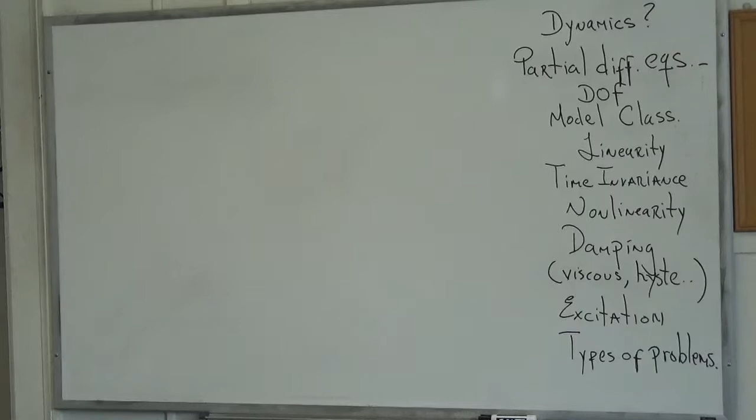Now, I have placed here on the right side of the board, I did my best so that this would be readable to you. I put a list of words, which are simply intended to give me guidance so I remember what I am supposed to be talking about. This first lecture is primarily introductory, so let's begin.

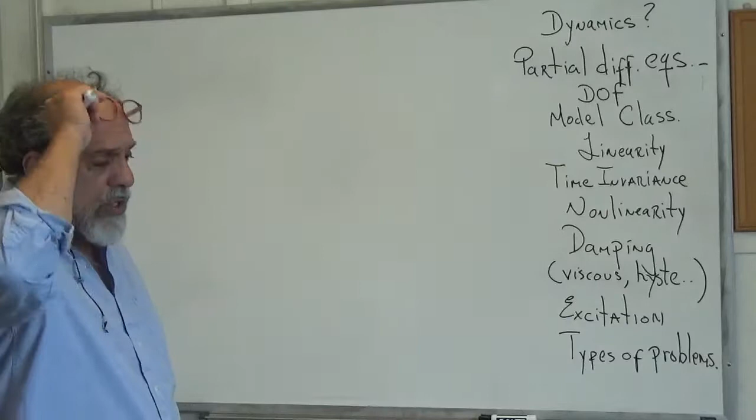My first word here is dynamics. So the course is called Structural Dynamics. Now, of course, we kind of know what structures are. But what is it that we mean by saying that a problem is a dynamical problem, or a problem that belongs to the realm of structural dynamics?

At this point in your career, we're all familiar with structural analysis, and what we mean by dynamics essentially is that when we have the structure under some excitation, we cannot neglect the effect of inertia. There's a slight twist you could add, because in other cases you could also say you cannot neglect the effect of damping forces, but that's maybe an unnecessary subtlety.

The point here is that as loads are applied to a structure, the structure deforms. If at any time we can analyze the stress field that the loads are producing, and we don't have to worry about the inertia, then we just have a static problem.

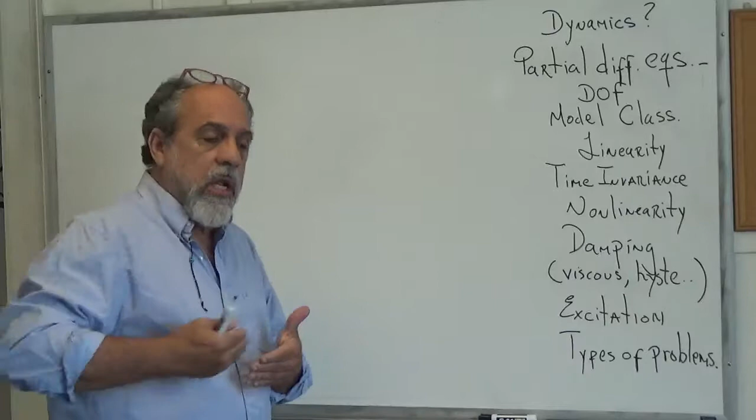Now, if you want to be really literal, you could say that all problems are dynamic, in the sense that there is no such thing as a static load, because if the load was at some point zero and then it became a value, the load had to grow over time, so it was time dependent.

Now look at this case, just to make this point, I won't dwell on it anymore because it's rather obvious. Let's say that we have this spring, with a constant K. If I apply a load and call the elongation of the spring y, and we apply a load at the end of the spring, P, which is a function of time...

Now, is this a dynamic problem? No, it's not a dynamic problem, because the equation of equilibrium simply says that the deformation y of this spring is the value of the load divided by the spring constant. So there is no differential equation here, there is no dynamics. The response as a function of time is just the load as a function of time. Even though this could be whatever, we still have the same as a static problem. If this load was static, we would simply say that y equals p over k.

So what makes the problem dynamic is not necessarily that the load is a function of time, but that the response of the structure to the load as a function of time is going to involve significant inertia response. So this is just a static problem.

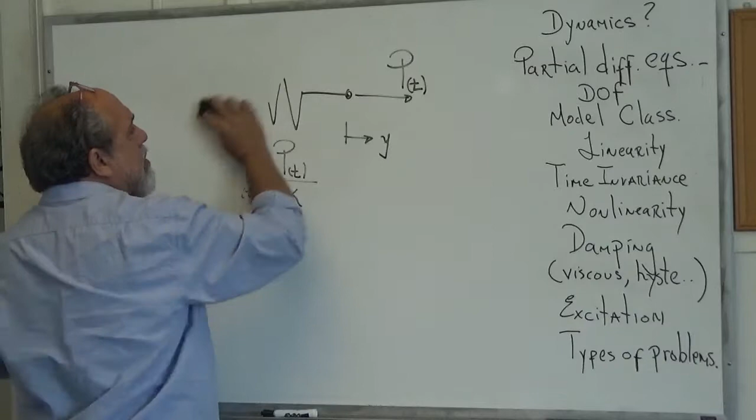Now, let's see, I'm going to try to keep the board as clean and visible as possible. So if we take that out and say, well, what if we look at the same thing? Of course, the previous spring is what we call an idealized spring, because even without thinking about it, I already assume this is a spring with no mass, which of course doesn't exist. How can you build a spring and have no mass? But in our idealized mathematical sense, we say the mass is small enough for our purposes. So anyway, it's just K.

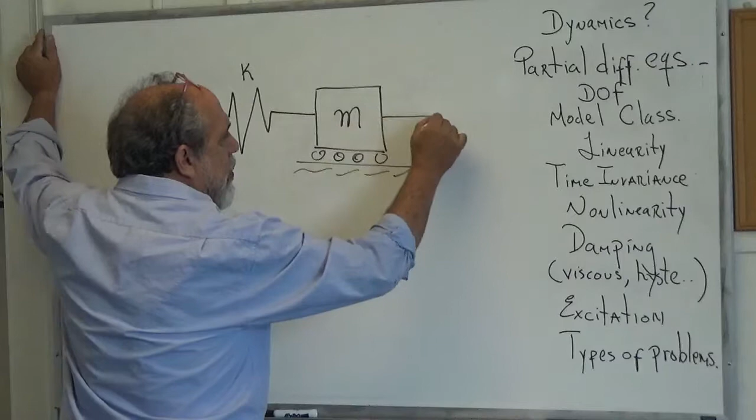Now let's say that we attach at the end of the spring a mass having the value M. And in order to make it look reasonable, so it doesn't look like the mass is falling down, I'm just going to put a little roller there, and do the same thing: apply a load P as a function of time and call the movement of this mass y, which is also going to be a function of time. Now, if we look at this and isolate the free body diagram of this mass...

Then we have the load P as a function of time. We also see that the spring is going to be pulling back as K times Y as a function of time, right? But we're only looking at equilibrium in the horizontal. In the vertical, it's obviously just the weight being carried. But if we look at that, that's not complete, right?

Because this mass in general is accelerating, and according to Newton's law, we know that force equals mass times acceleration. Now, in mechanical engineering, it's typical to write things like that. Let's say force equals mass times acceleration.

That means, I'm sorry, what did I do here? Where's the eraser? Not force times acceleration. The summation of the forces is equal to the mass times acceleration. That's what I meant to write. So this is Newton's law, right? The summation of the forces is equal to the mass times acceleration.

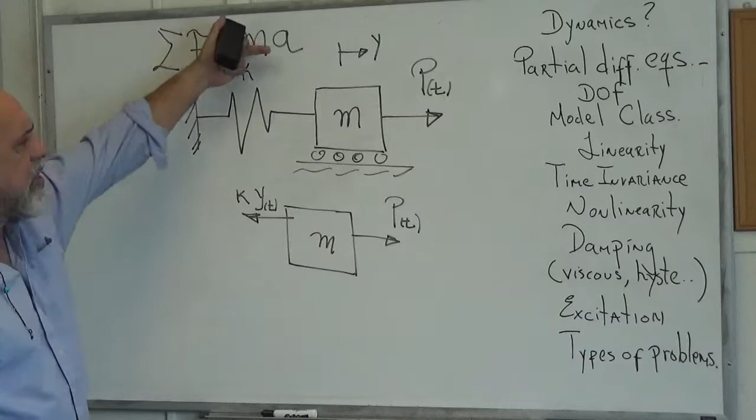In civil engineering, because we come from a tradition of statical structures and statical things, and we don't want things to move and so on, we've traditionally written this equation not as summation of the forces equals mass times acceleration, but we tend to write it like this: summation of the forces minus the mass times acceleration equal to 0, which is obviously the same thing, right?

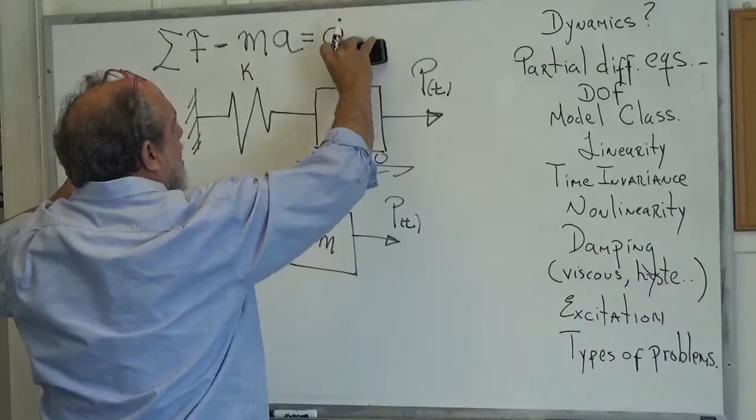Putting back my y here. So again, sum of the forces equals mass times acceleration, or sum of the forces minus the mass times acceleration equal to 0. In this sense, we look at the equation of dynamics as if it was an equivalent equation in statics. So what happens then is that we draw the inertial force, right?

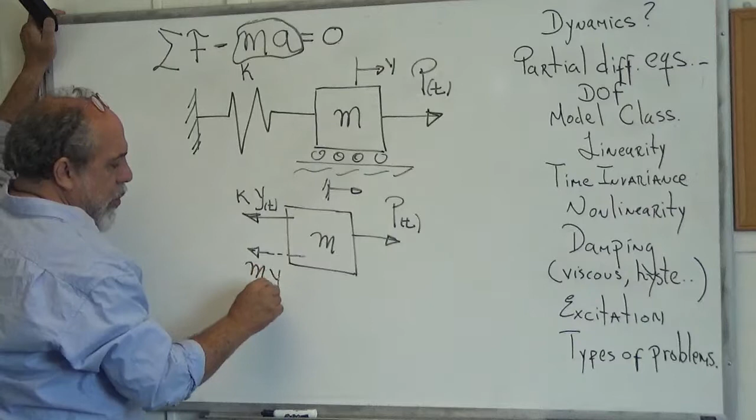This is the inertial force, in a direction that is opposite to the positive acceleration. And so in this case, since y is positive to the right, we would say the acceleration is positive to the right, and so we would put an acceleration to the left and say there is an inertial load, which is mass times the second derivative of y with respect to time, right? And then we can treat this free body diagram as being a statical problem or an equilibrium problem.

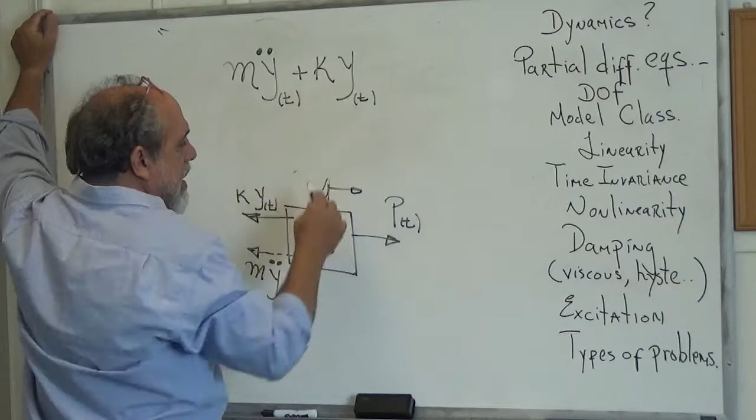So from that sketch, let me erase the top here to give me a little room. So from that sketch, we can see then that summing forces in this direction, we would say that mass times acceleration, the double dots mean derivatives with respect to time, plus the stiffness coefficient of the spring times the displacement, minus P(t), or putting the P(t) on the other side, is this, right?

So in this case, we can no longer say that y is just P over K, because we have the inertial term. So what is the static problem? It's the problem in which this inertial term is so small compared to the other term that we just simply discard it, right?

Now, in this particular case, I placed no energy dissipation. This would be a conservative system. In any case, this problem, like this, is simply what? A second order differential equation.

So given P as a function of time, this doesn't require any real engineering per se. You can give this to somebody that just knows a little bit of mathematics of differential equations, and if P is sufficiently simple, we can just solve for y as a function of time, right? And so on.

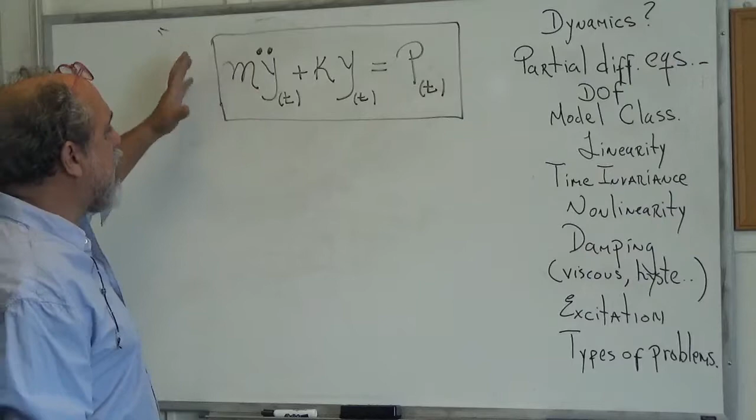We will come back to this, of course, later on. But at this point, what I want to say is it's not to focus on the solution of this equation, but to focus on the next line here on the discussion, which says partial differential equations. So I'm going to erase the first term and assume that we already made sufficient observations. I'll wrap it up by saying this.

There are problems in which the load may be varying with time, but there is no need to do dynamics, because what we've got is just a sequence of statics problems, because the mass or the inertial forces associated with the solution to the problem are not relevant compared to the stiffness resistance to the applied load. That simply means that the load is applied too slowly in relation to the ability of the structure to react.

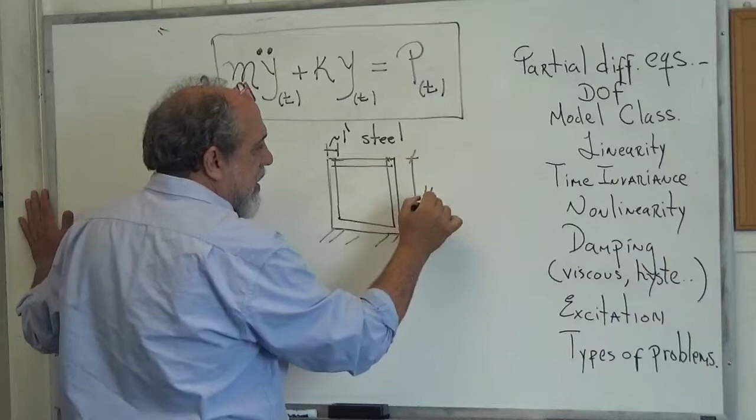If the structure can react very fast, for example, just as a last thing, imagine that you have a container like this sitting on the ground, let's say a box, and this box is 1 foot thick, made of steel or something, and it's 10 feet high or something, and then what you have is a load here, P, which is applied, which is a function of time, but it's varying like this, where let's say this is 2 minutes.

So more or less on that scale, you can see that this load is varying so slowly that, well, perhaps here you could see a little bit of dynamics if it's going up fast enough. But my point is that this structure, if you actually plotted how much this point will move due to this load, it would look just like this plot also. There's no inertia, just the load. Even though it's a function of time, there's no dynamics here. Okay, let's leave that aside and move on.

Our next point is that when we draw a mass, like in the previous example, and say this is a point mass, this is an idealization. There are no point masses. Mass is always distributed. The problem is always one in which there is stiffness everywhere and mass everywhere.

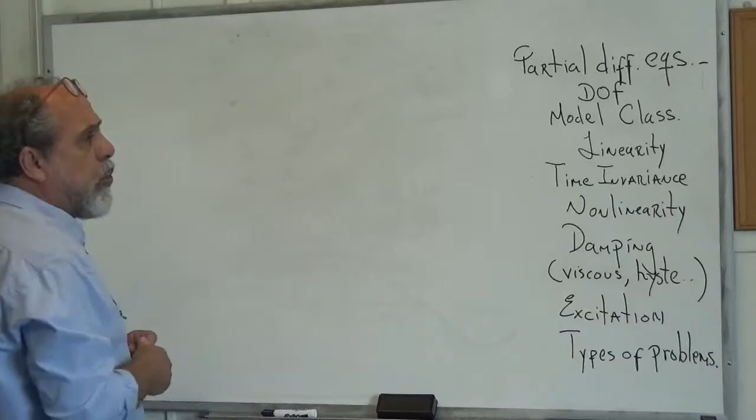So what happens is that we get not ordinary differential equations, but partial differential equations in dynamics. The true solution of any problem in structural dynamics, if we really want to be precise, would have to be partial differential equations. Although in practice we seldom deal with partial differential equations, because it's significantly simpler to make approximations that allow us to use ordinary differential equations.

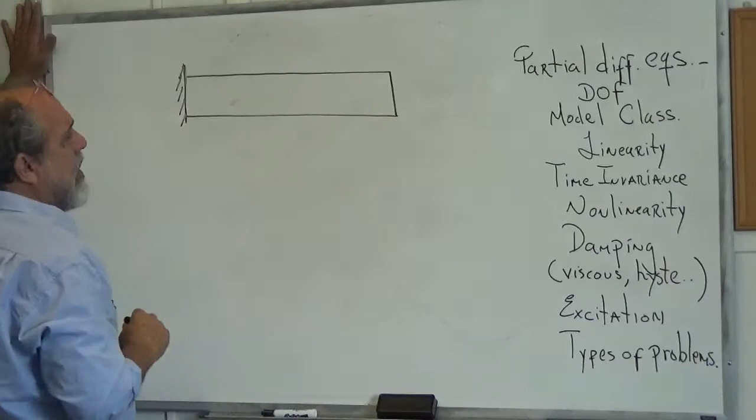But leaving that for next, let's consider for the next section of the discussion the case of a rod. Let's say that this rod is of length L, that it has an area equal to A, and a modulus of elasticity equal to E, and that length is L. And let's say that at the end of this rod we have an applied load P of T. Let's postulate that the X-axis is running with the rod.

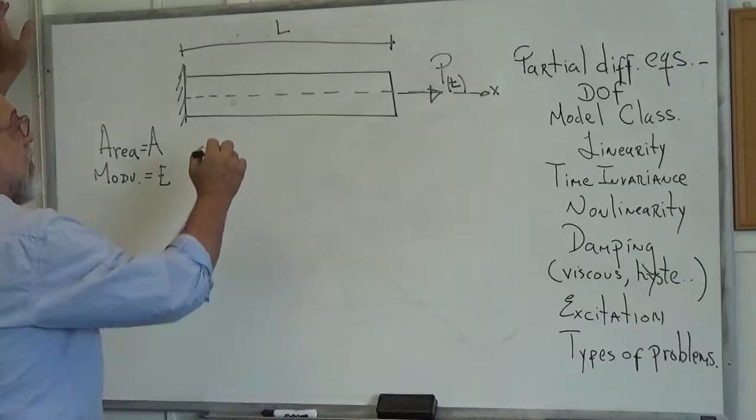Excuse me for a second, let me check here just to make sure I keep my notation the same as in a set of notes I'm going to give you. So, to be consistent with what the notes are going to show, I'm going to call the movement of points in the rod in the X direction u, due to the load P of T. And that's basically it. So we want to examine this situation.

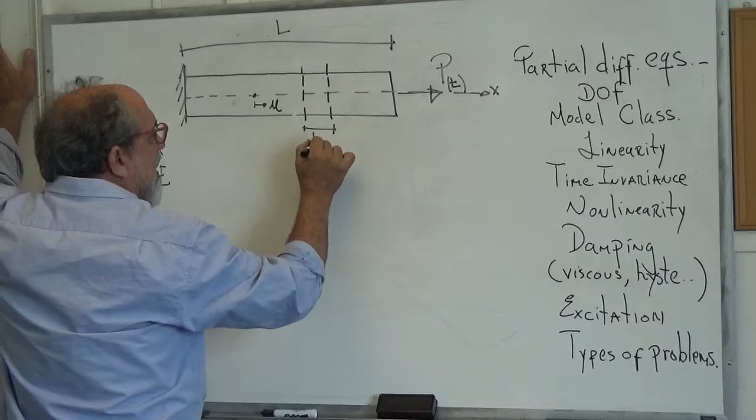For this purpose, let's say that we take a piece of rod which is of length dx, and we look at the free body diagram of it. So this is a dx section of the rod, and we would have the following situation.

I'm assuming that the load is centrally applied and that the material is responding such that we have a uniform stress field here, just pure axial stresses. This stress, sigma, that we have on the back side of the cut would be a function of x and a function of time, right? Now on the front side of this free body diagram, we can say that we have the stress sigma that we had in the back plus how fast the stresses are changing in x.

So we would say the partial derivative of the stresses with respect to what? With respect to x, right? Multiplied times dx. So that would be the stress field over here. Now, those are the two stresses.

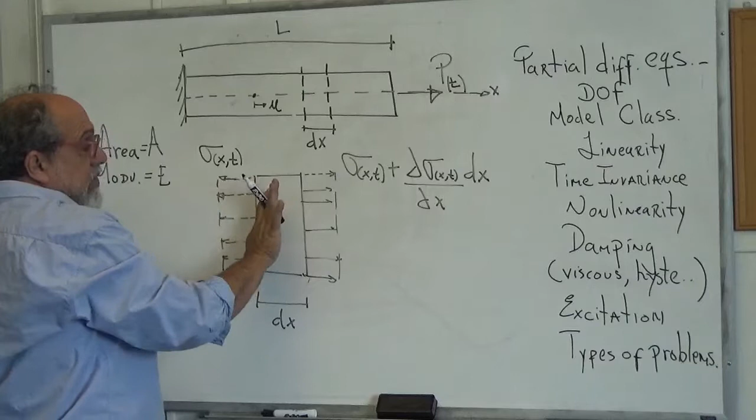What else is there? Well, it looks like there should be an inertial force, right? So this is a very thin slice, only dx. Since I'm taking accelerations to the right as positive, using again our technique of writing the thing as equilibrium, there will be an inertial force here, which would be the mass of that sliver times the acceleration of this point. Now, how much mass?

I should say, let's let the density of the material, the mass density, be rho. That is how much mass per unit volume. So we can say that the mass of this sliver here is going to be the density times the volume of this thing, and the volume of that is the area times dx.

So that's the mass, and then that mass has to be multiplied times the acceleration of that sliver, and the acceleration of that is, by definition, the second derivative of the displacement u, but in this case, with respect to time.

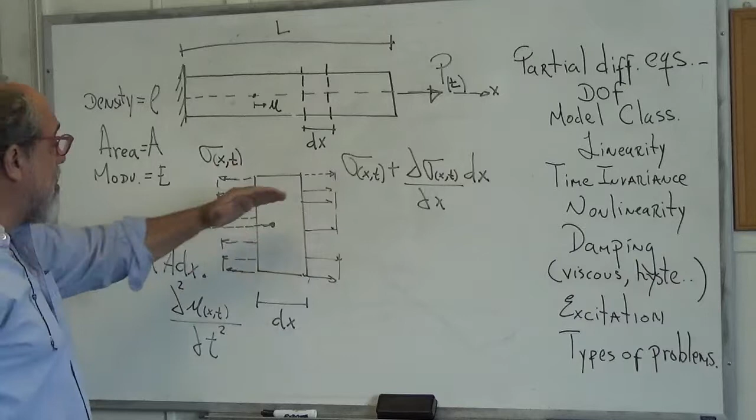So that, I believe, is the complete free body diagram, except I have to convert these stresses to forces before I sum. Basically that's complete because we're not considering any energy dissipation, right?

So I will now erase so that we get some room to work on the top. And so I'll erase this.

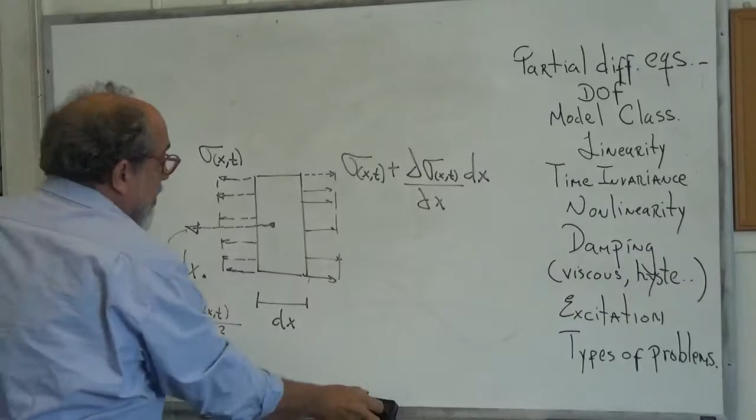From this free body diagram, I will say sum of the forces in the x direction equal to 0. I will have sigma, and I'm going to leave the x and t out to simplify the notation. It's clear that that's what I mean, right? So sigma plus the partial derivative of sigma with respect to x times dx, multiplied times the area.

That's a force going to the right, minus a force coming to the left, which is the same. Force coming to the left is just sigma times the area. There is no partial here, right? And also to the left is the inertia, so we have minus rho times the area times the second partial derivative of the displacement with respect to time, times dx. Times dx. I believe that's everything, right?

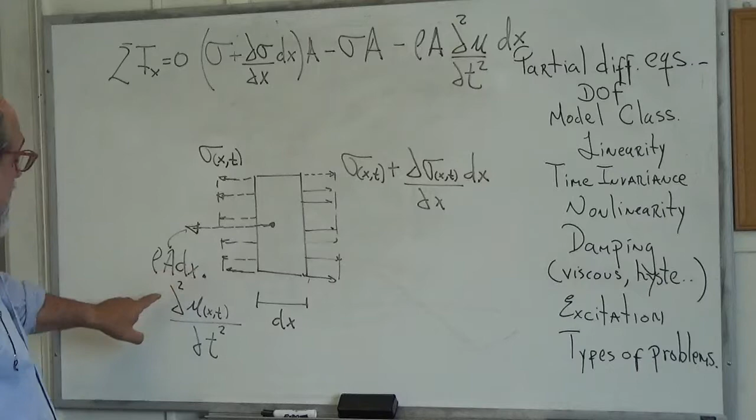Make sure I get this thing correct. No, I didn't. Yes, I did. Rho a dx times the second partial of u with respect to time. And all of that must be 0, right? Okay, now I erase this. Hopefully I didn't leave anything out.

And then we simplify. Now it's clear that this term, sigma a, will cancel with this sigma a, right? And that we're left with partial of sigma with respect to x dx times the area minus rho times the area times dx times the second partial of u with respect to time is equal to 0, right? All right, so we continue to simplify.

We see that the area can be cancelled. Okay, we also see that the dx can be cancelled, and that we are left with the partial of sigma with respect to x minus rho times the second derivative of u with respect to time squared is equal to 0. Okay?

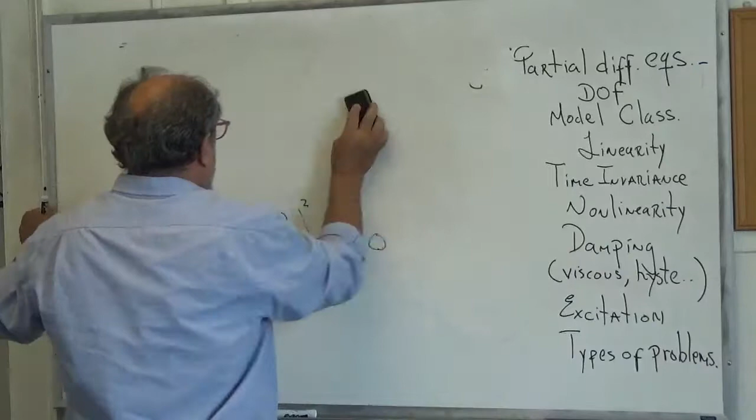Now, let me check here if I'm still doing all right, and I guess we are. I'm still maintaining the notation here. Okay, so now the next thing we're going to do, again, is give ourselves a little room. So we erase here. All right, and we continue by saying, okay, so this is a statement of equilibrium right here.

Let's now assume that the material is linearly elastic, so that we can say that the stress is equal to the simplest expression of Hooke's law, which is the modulus of elasticity times the strain, right? Now, the strain as a function of the displacement is what in this problem? Is the partial derivative of the displacement with respect to the coordinate x, right? So we know that sigma is E times the partial of u with respect to x.

And it thus follows from here that the partial of the stress with respect to x is just simply the derivative of this, which is equal to E times the second partial of u with respect to x squared, right? And so we have that.

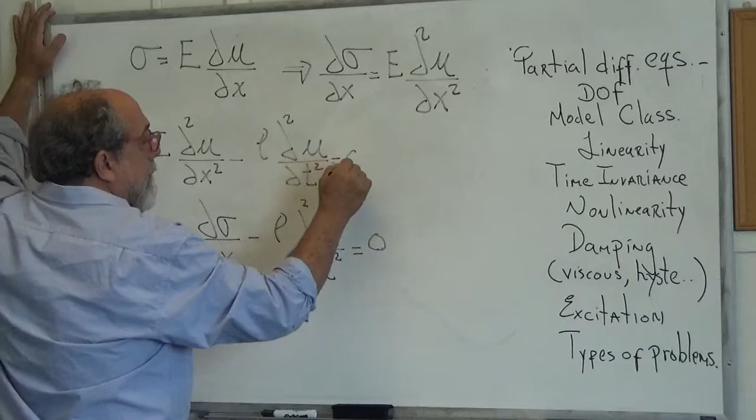Therefore, substituting this here, we would get E multiplied times the second partial of u with respect to x squared minus rho times the second partial of u with respect to time is equal to 0. And I think at this point, I can take this out. I can take this out. And this is where we are, right?

Now, dividing by E, we can write that the second partial of u with respect to x, two derivatives, minus rho over E, times the second partial of u with respect to t squared is equal to 0.

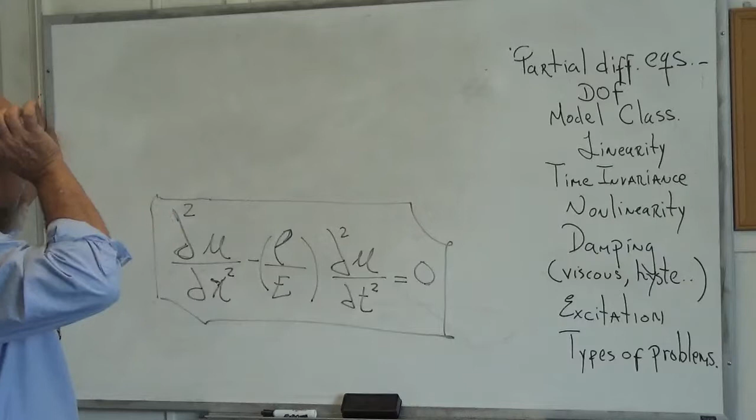So you see that we've arrived not at an ordinary differential equation, but at a partial differential equation, because we have derivatives with respect to x and derivatives with respect to time in the displacement field, right? We also see that the problem is governed not by the density or by the modulus independently, but that the response depends on the ratio of the density by the modulus of elasticity.

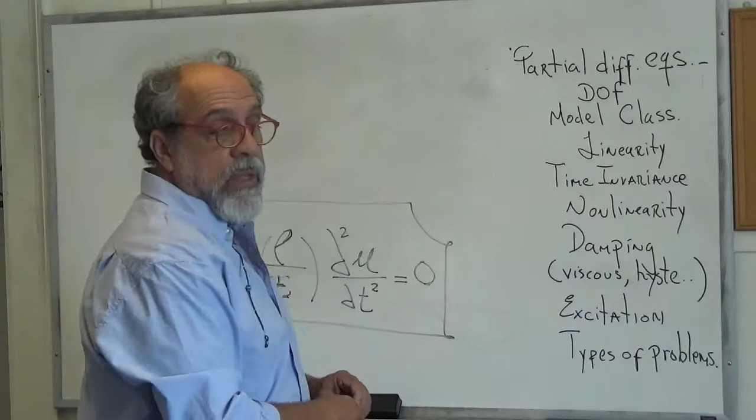Now, let me see how far I want to take this by looking at the notes here. Well, so let's say, for example, that we wish to solve this thing. Of course, this doesn't even have anything to do with the loads at this point. So you could, let's say, for a little bit of an exercise, look at the boundary conditions, right? And what are the boundary conditions of this problem? Well, I remind us that our rod looked like this, right?

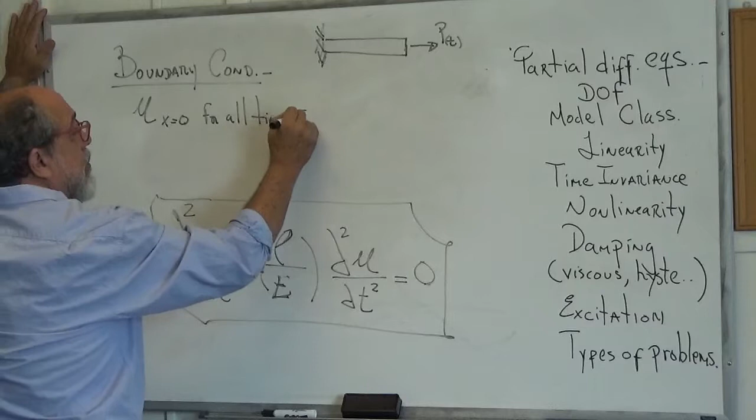Our rod looked like this. So one thing we can say is that u at x equal to 0, for all time, is equal to 0, right? That we know. So that's one of the boundary conditions that we have in this problem.

The other thing that we know is a boundary condition associated with the presence of the load here at the tip, which means that the stress at the tip. So sigma at x equal to L for all time is equal to P(t) divided by A, right? Because over there, that's just the edge, and at the edge, at least under an idealized situation. You might say, in reality, if this is a concentrated load, then of course that's not true because there's an edge effect and so on.

But this is not what we're considering. We're considering the idealized case in which that load P(t) is not really applied like that. To be really precise, I should say that load is the resultant of a stress field which is applied uniformly at the end. So what we are really applying is P(t) over A, and this is the result.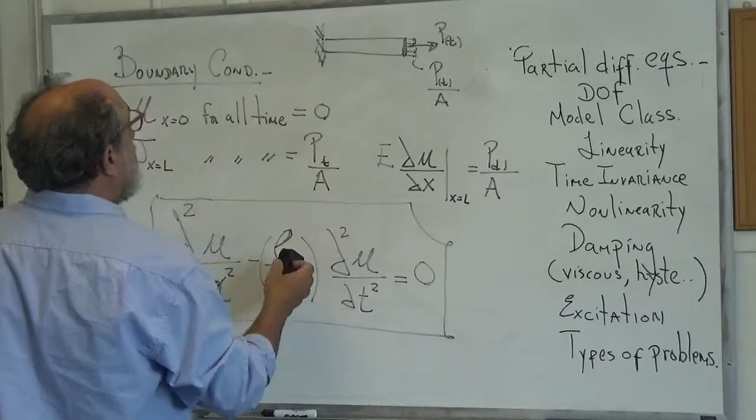Now, sigma that we have is equal to what? Sigma was equal to E multiplied times the first derivative of u with respect to x, right? So what we're saying is that, evaluated at x equal to L for all t, must be equal to P(t) divided by A, and therefore we can also say, running out of room here, but try to put it here on top, we can say that the partial derivative of u with respect to x evaluated at x equal to L for all time must be equal to P(t) divided by A divided by E, right?

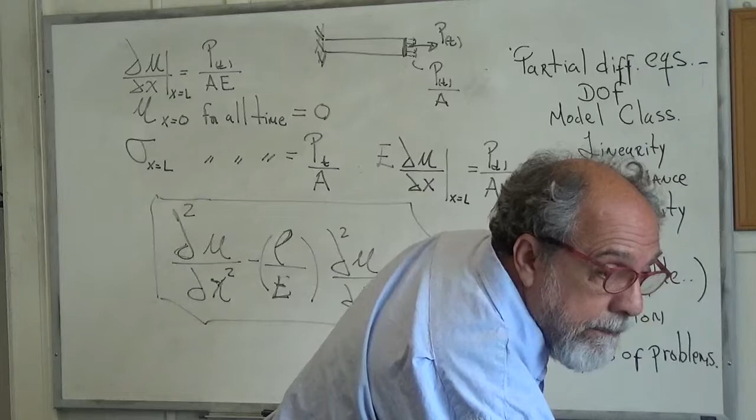And okay, we get to that point. Now, we could try to solve the problem even further, and in fact, I have a handout that I will decide a little bit later whether we want to do it or not, to delve into it, because there's quite a few interesting things that one can do by continuing along these lines.

But I think at this point, for the purposes of this introductory lecture, it's sufficient to simply point out or emphasize that if you consider a problem and you account for the distributed nature of the mass, what you end up with whenever you formulate a dynamic problem is not going to be something like mass times the second derivative of the displacement, but you're going to find a partial differential equation-ish thing, okay?

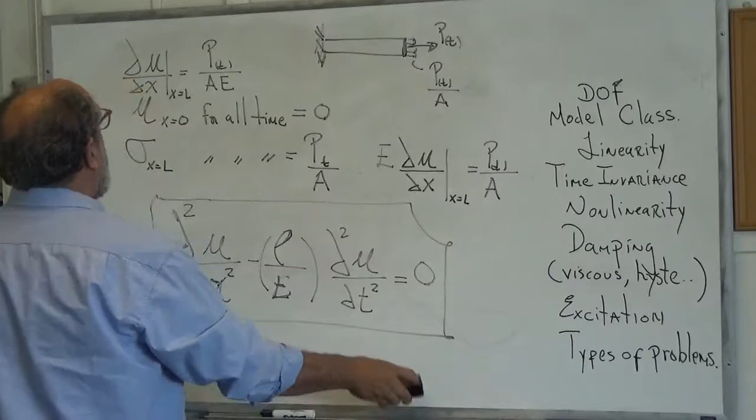And that brings us to the fact that I can erase these partial differential equations, and it takes me to this thing that says DOF. Because by DOF we mean degrees of freedom. So let me discuss then the issue of degrees of freedom, the all-important issue of degrees of freedom, from the point of view of clear understanding.

So if we wanted to do the rod exactly, we would have to solve this equation. Well, let's say that we don't like this equation because this equation is not algebra. I cannot really program it and solve it by taking it, you know, I'd have to solve the equation with its boundary conditions and so on. That may be hard. Now, it's clear that I can convert this problem into a problem that is not a partial differential equation problem, but one of ordinary differential equations by, for example, dividing the rod in pieces.

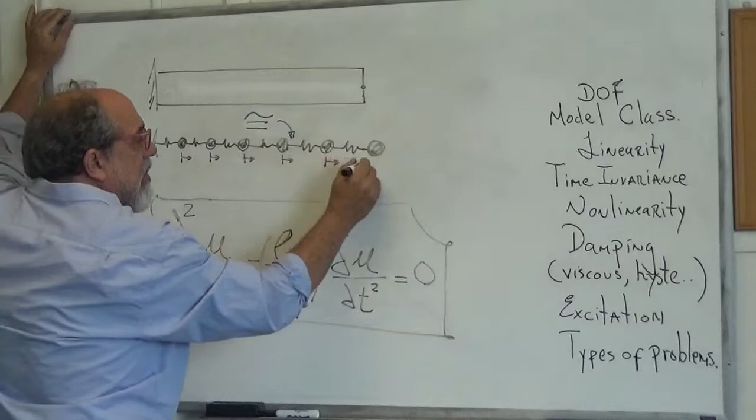Dividing the rod in pieces and assuming that what I have really is a set of springs with little masses connected to each other, right? So let's say that what I've done, maybe I can erase this, is to say that the actual rod is not equal, but it's approximately equal to this. Now, of course, we're talking only in the horizontal direction. In this particular case, it suffices to know how much each one of these masses are moving, because given the movement of these masses, we can calculate the force in the springs and so on.

And we would refer to this problem as having 1, 2, 3, 4, 5, 6 degrees of freedom, or coordinates that we need to describe the problem. Now notice, and this is the point I want to make, that this 6 degrees of freedom is not an innate property of this rod. This is actually a decision that I've made as a user, describing the structure with a finite number of degrees of freedom. The actual rod has infinite degrees of freedom, and I may make a model. So models have degrees of freedom, real structures don't, because real structures have infinite. They have distributed mass and so on, right?

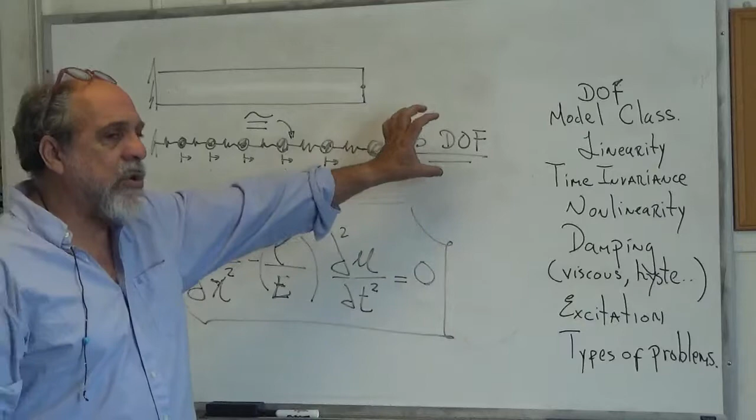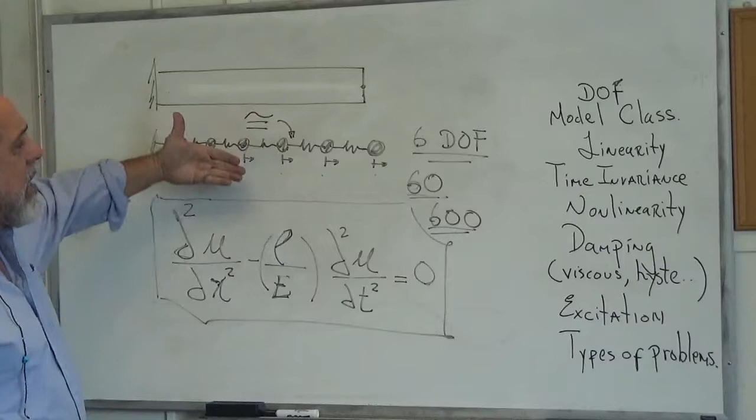Models have degrees of freedom, and we sometimes forget that when we say a frame has this many degrees of freedom, there are implicit assumptions already accepted. In this case, it's obvious: I can make a model of this rod with 6 degrees of freedom, or 60, or 600, and so on. As the number of degrees of freedom or masses increases, the model approaches the real rod further and further.

So the first point is that degrees of freedom is a property of the model, not of the structure we've made. Let's see what else is important to say.

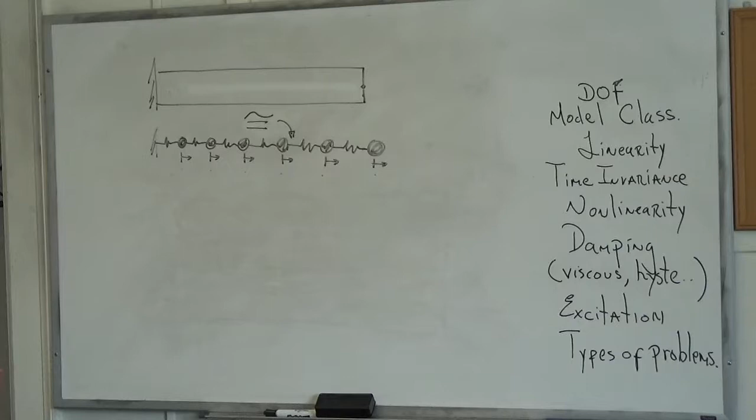Let's take a look at this one, 1, 2, 3, 4, 5, 6. You can map the locations of these masses to the actual physical locations in the rod, something like that. I don't pretend to be precise here as to where exactly you should put each one. That's not important for what I'm talking about.

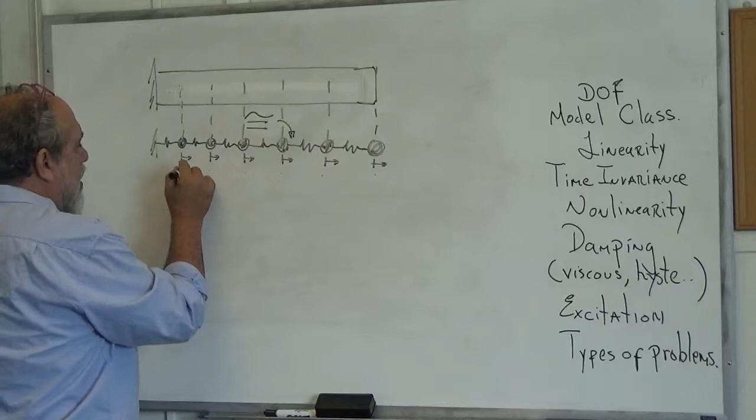Let's call these number 1, number 2, number 3, number 4, number 5, and number 6. At a given time, t equal to t1 or ta, we said that u was equal to A1, A2, up to A6 — six numbers, whatever they were. That's fine.

Now, if I asked you, what is your estimate of the displacement in the rod in the very middle between 4 and 5 at this time — what is u here at t equal to ta? I think most of you would say, well, it's not in the model, but I would take it as the average of 4 and 5 or something like that.

And that's totally reasonable. But the point I want to make is that when we assign to a structure a set of degrees of freedom, implicitly — sometimes explicitly, but often implicitly — we've actually assumed the displacement field in between the coordinates. For example, you might have assumed, even without saying it, that the displacement field between points where you're giving values is linear.

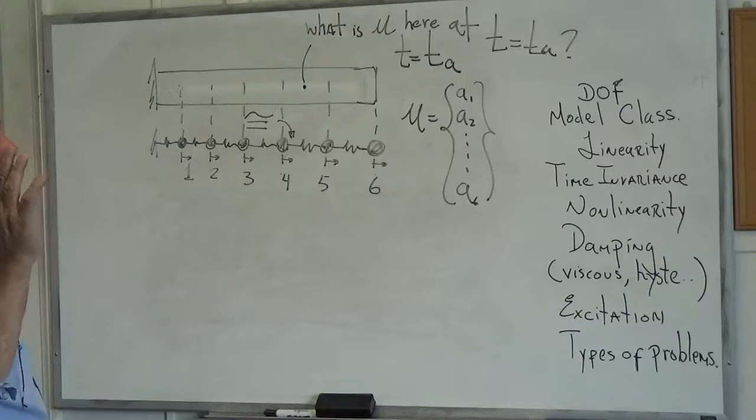Because of course the domain is continuous, the fact that we only have values at a certain number of points doesn't mean that suddenly we know nothing of what happens in the middle. What happens in the middle has been pre-decided, okay?

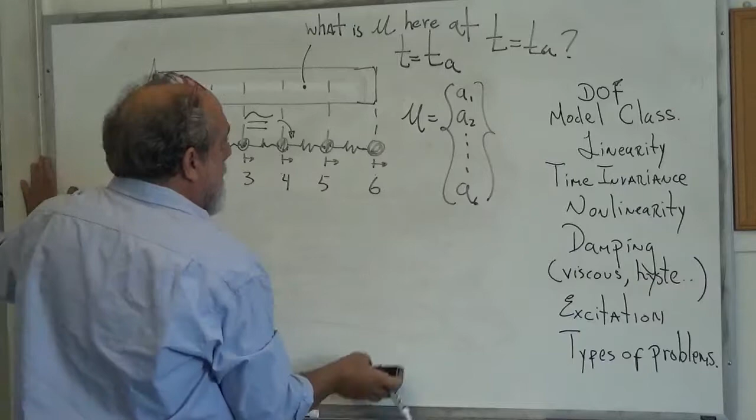So you could say that what the degrees of freedom do is they become the scalars of patterns. Let me explain again — this is important to emphasize, to try to be clear.

So let's say I have this beam, this simple beam — a simply supported beam. And this simply supported beam has a distributed mass m per unit length, and the beam is of length L.

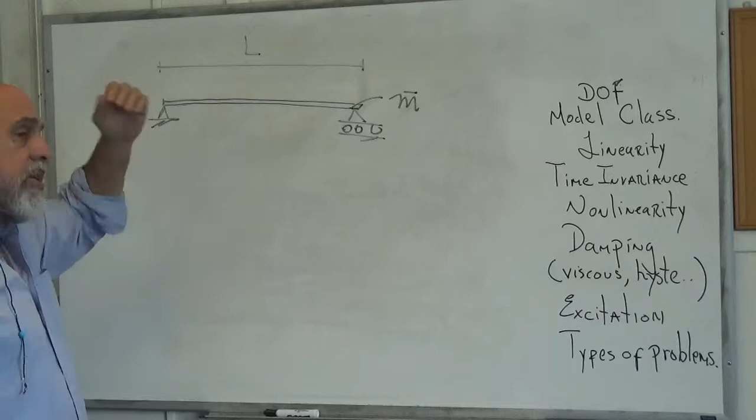Now, how many degrees of freedom does this beam have? Infinite, like every structure. If I want to really be precise, I'm going to get partial differential equations. Now, let's say the boss at the company says you want to make a model with 3 degrees of freedom of this beam for some dynamic analysis about impact of a big weight that's going to fall on the beam, whatever.

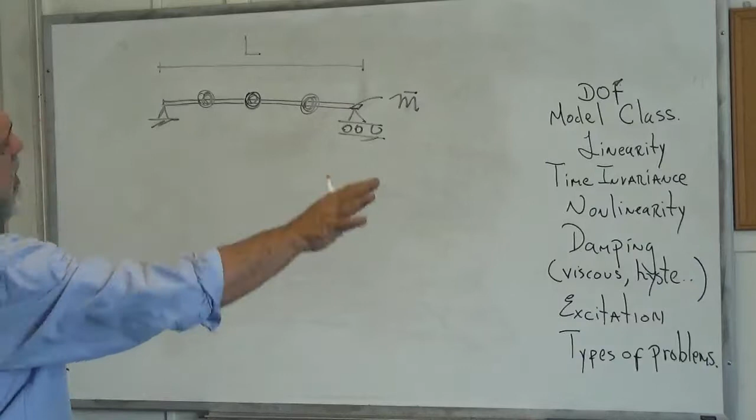So let's say you're told to make a 3 degree of freedom model. I haven't really done very much with this, but my intuition tells me I should get something reasonable if I do something like this: take one mass here, one mass here, one mass here, and assume the beam has no mass.

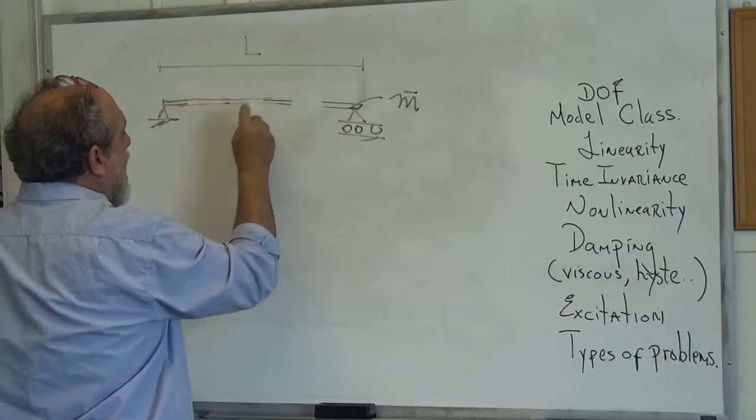So I'm going to replace — actually, let me do this again. Where is the eraser? Excuse me — oh, it's on the floor. Instead of drawing it here, let me just leave the real beam alone, and let me say what I'm going to do — I can't draw this approximately equal sign.

What I'm going to do is replace the real beam by this, where this is massless, and these are, something reasonable, the mass from here to here, etc.

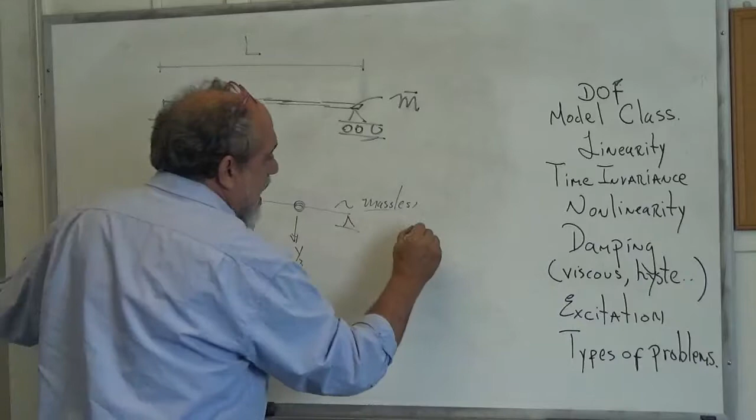My concern is only the movement of this point, this point, and this point. I hope to arrive at the equations of motion and do the dynamics on what will eventually be a 3 degree of freedom problem. We don't need the specifics, the point is this would have 3 degrees of freedom.

Now here comes a question that is less obvious. If I told you that at some time t equal to ta, you had y1 equals 3, and it just so happened that y2 was 0 and y3 was 0, what would you say is happening between y2 and y3, to the displacement field at that time?

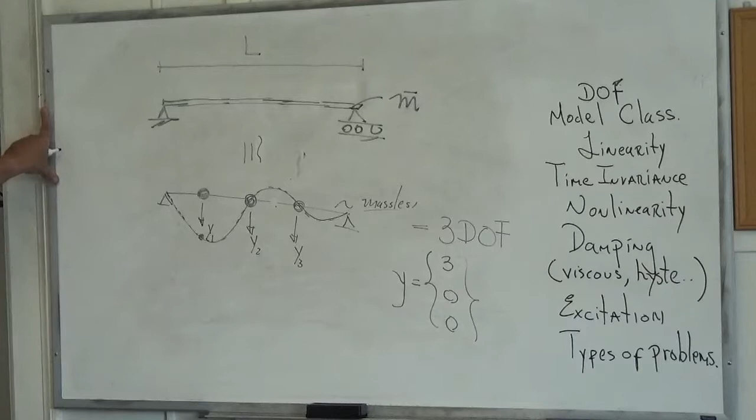Some people might say, I don't know, I'll take it as 0 or something like that. But you might actually assume the following: that if y1 has a value and y2 doesn't and y3 doesn't, my beam would look like that, because I have to have continuity and so on. So this looks like a better guess to me.

And what would that shape be? Well, that might be the shape I'd get if I move this point statically and hold the others in place, and so on.

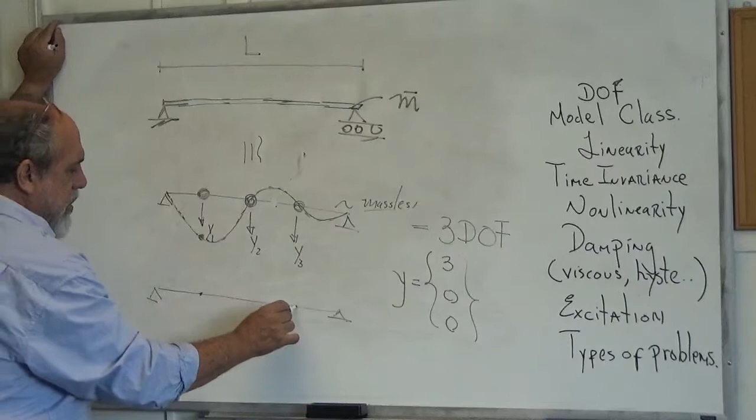Following that line, what happens if instead of y1 having a value, y2 has a value, and none in y1 or y3? It might be along the same lines - not so bad to assume, right? This is y1 not equal to 0, this is y2 not equal to 0. And what about completing it with y3 not equal to 0, which would look just like y1 but on the other side? So now y3 is not equal to 0, but y2 and y1 are 0, and we get something like this.

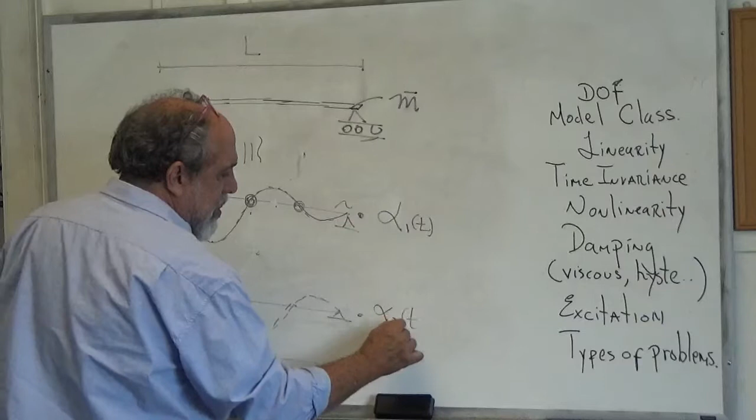So in this particular case, we can see that the degrees of freedom y1, y2, y3, which are movements of the masses, I could also think of as not being the movement of the masses. I could think of the degrees of freedom as the amplitudes of these shapes. So this shape multiplied by alpha 1, a function of time, this shape multiplied by alpha 2, a function of time, and this shape multiplied by alpha 3, a function of time, is the deflection of the beam at any time. So sometimes we think of degrees of freedom as physical, visualizable movements or rotations, and sometimes as shapes multiplied by amplitudes.

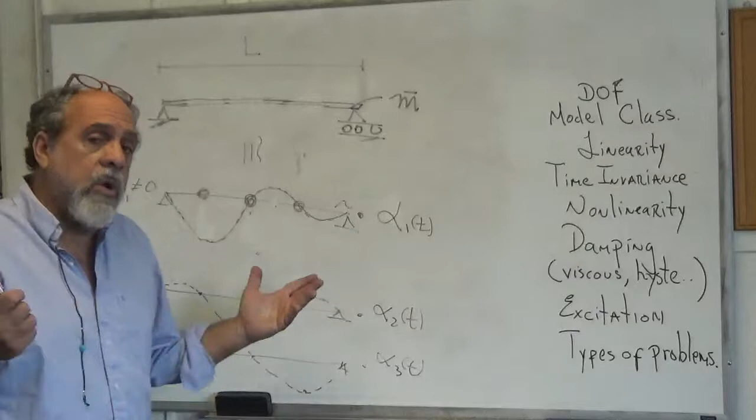In most texts these things are presented as if they were completely different. In my mind they're the same thing - you always have an assumed shape, because the domain has to be interpolatable when the degrees of freedom are known. So you can think of this problem as having y1, y2, y3, or as having alpha 1, alpha 2, alpha 3, and these are the shapes. You get to exactly the same thing.

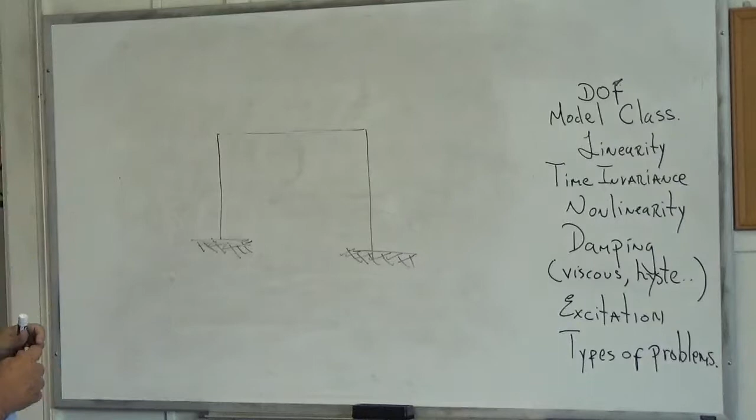Now a last word on degrees of freedom, let me be conventional here. If we look at this problem - and since most of us are in structures, although this doesn't have to be understood only by structures people - let's say you consider a system like that, and give it some width. Let's assume this structure is excited by a dynamic load, P of t, applied there, so it starts moving to the side like this.

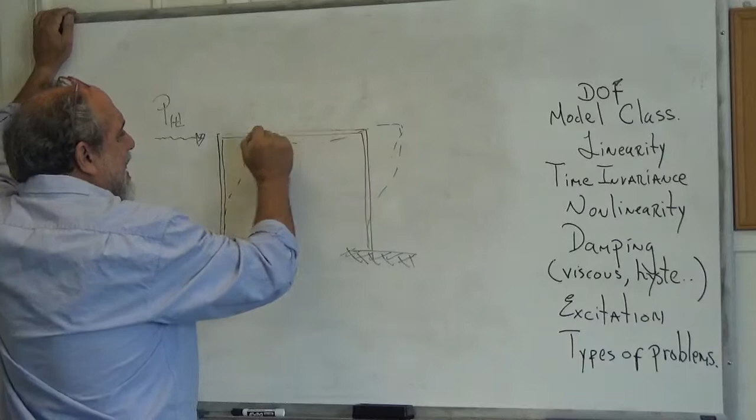Back and forth. It turns out that most of the inertia is associated with the floors, because this level contains - remember this is 3D - so there's going to be another one behind, and so on. So most of the mass of this structure is contained here. For the purpose of dynamics, the only inertia that matters is really the horizontal inertia of this level. So from that point of view, this system could be analyzed using probably only 1 degree of freedom, because there's only one inertia.

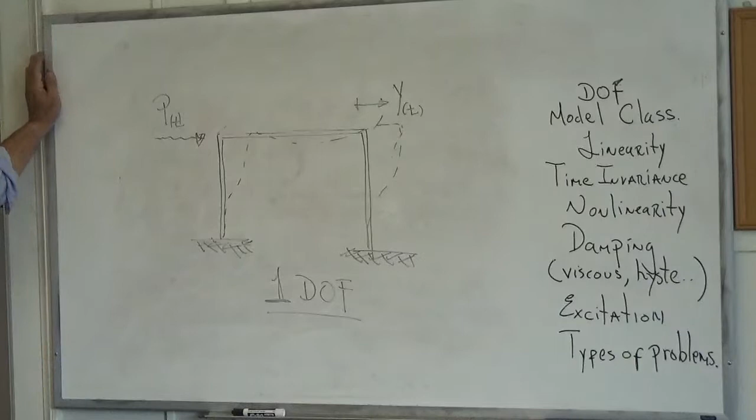As long as I know the time history of this horizontal movement, I can probably do what I want. We don't have to know the specifics, except that whatever the weight of these columns is, I can add them to the floor and take half of the weight down to the ground. What I really need is to know the horizontal motion of that mass. So it seems like 1 degree of freedom would be sufficient for my dynamics problem.

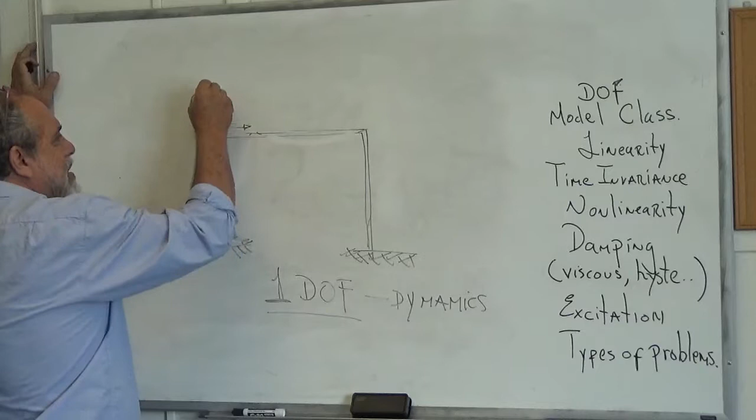But if I look at this structure, and the problem was in a class of structural analysis, traditional, not structural dynamics, then people would say this structure has how many degrees of freedom from the point of view of a conventional analysis? Most people would say it's got 6, because this is what a computer program using the stiffness method would assign: 1, 2, 3, let's say 4, 5, and 6. So for a static analysis, this problem would be assigned 6 degrees of freedom.

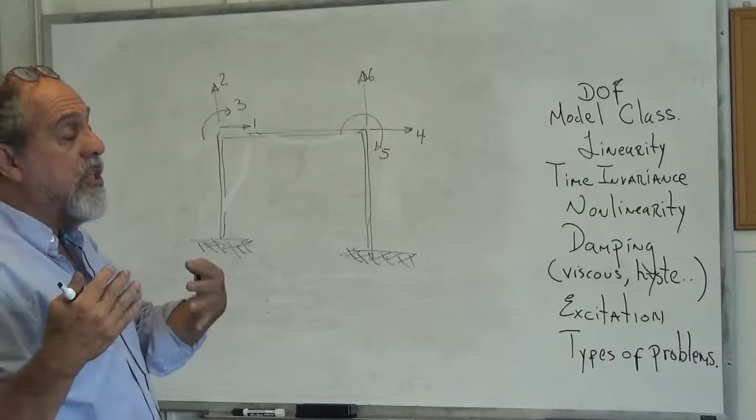However, for dynamic analysis, we would say that we have 1. The process of reducing the degrees of freedom to the degrees of freedom of a dynamic analysis is one that's important to understand and be clear on. Some of them are assumptions, and some are condensations due to the fact that there is no inertia.

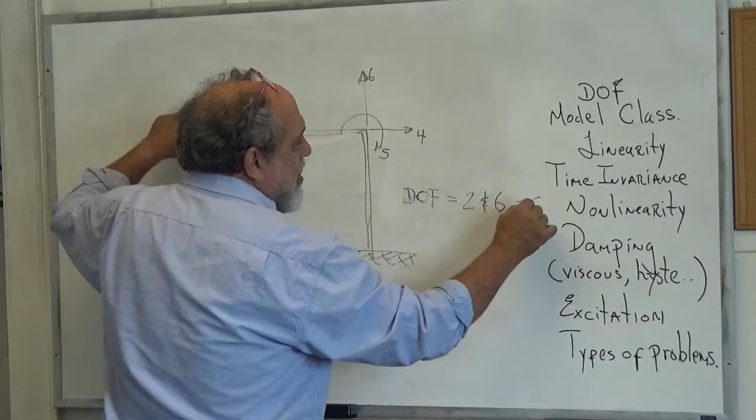For example, in this particular case, essentially what we would say is that degrees of freedom 2 and 6 are essentially 0. That is, there's going to be essentially no vertical motions compared to the horizontal sway, so we get rid of those.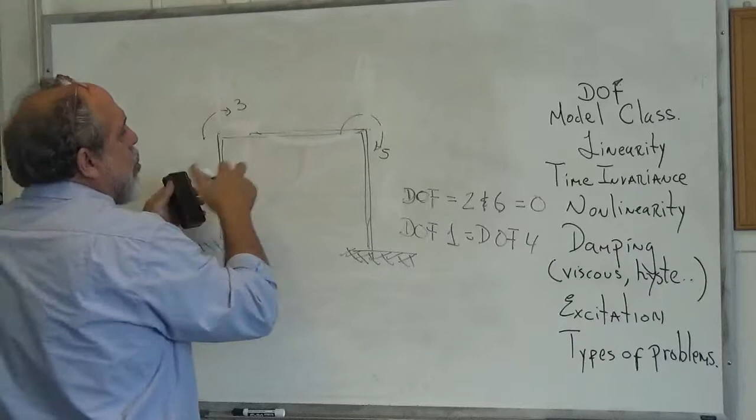The other thing is, we say this bar doesn't elongate hardly, so we would say that degree of freedom 1 is equal to degree of freedom 4, and so we can essentially get rid of this 4 - 1 is really throughout, right? So it's the same; 1 and 4 are the same, just the horizontal motion of this level is degree of freedom 1.

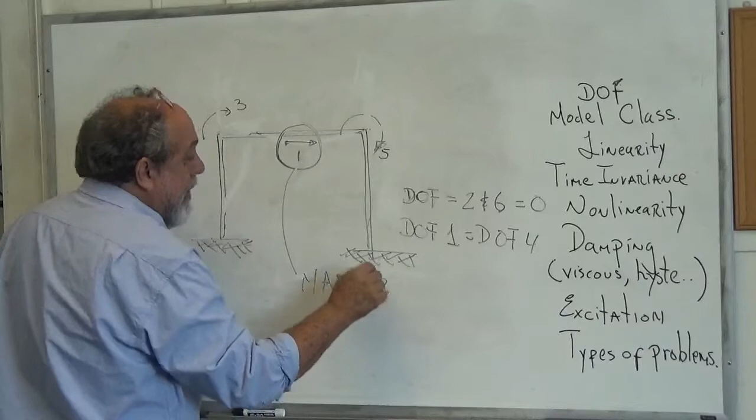Now we've got 3 and 5 left. Now 3 and 5 are not necessarily very small. We don't want to say they are 0, because if we say they are 0, these joints can't rotate. But what we're saying is that 3 and 5 are not dynamic degrees of freedom - that is, they are not associated with inertia themselves. So then we say that this degree of freedom, which is the one associated with inertia, is the master. These degrees of freedom, which are not associated with inertia, are slaves.

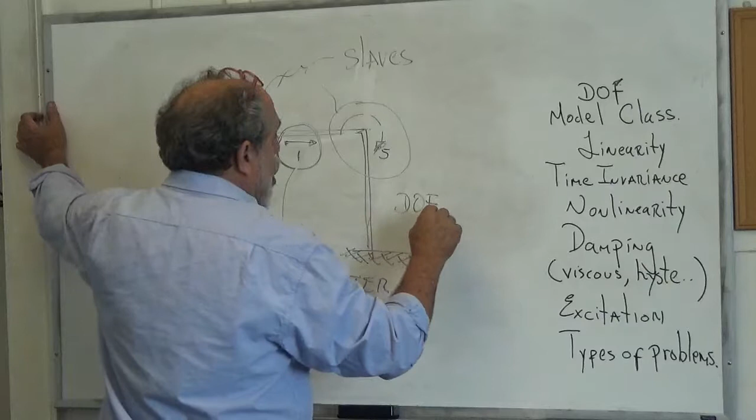Even though I don't have to do it at this moment, or I will not do it now, but maybe I will - what we're saying is that degrees of freedom, and the name masters and slaves is because degree of freedom 3 and 5 are determined by degree of freedom 1. In other words, if I know degree of freedom 1, I know where 3 and 5 are, because I am forcing my structure to behave in a certain way.

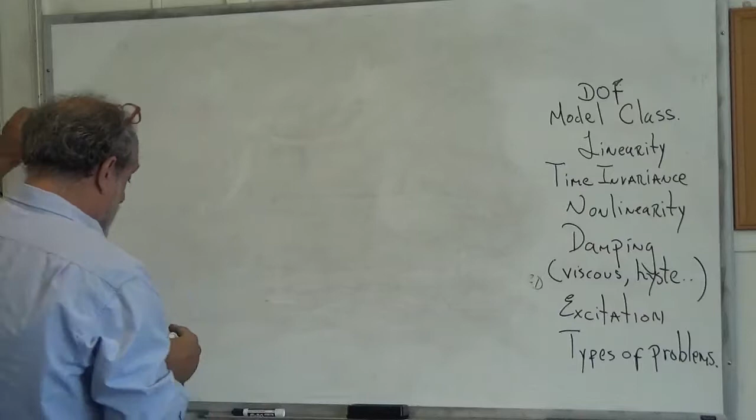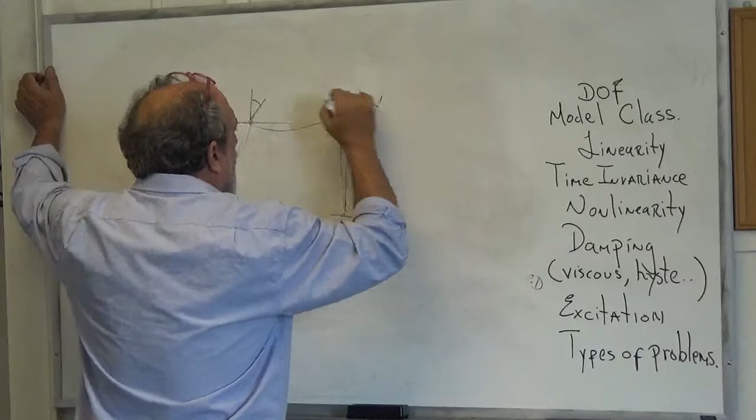What we say is that degree of freedom 3 and 5 would have to follow number 1. That is, for example, we would say if degree of freedom 1 is here, that means the structure has no choice but to look like this, and so the rotation of this joint and the rotation of this joint, which is 3, theta 3, theta 5, are a function of delta 1.

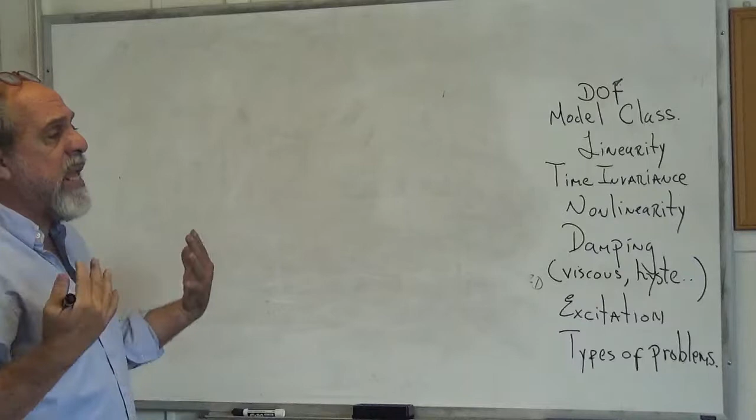So, in summary, we may have a large set of degrees of freedom in the description of a finite element model - a very large number. But we're going to do a dynamic analysis, and that does not mean that all these degrees of freedom are dynamic. Some of them, for the purposes of reducing the size of the problem, we may take as 0. And many of them, which are not associated with significant inertias, are what we refer to as condensed - that is, they are taken out of the problem by expressing them as a function of the others.

Now, let me indulge mathematically for a second here as follows.

Imagine that our problem that has mass and stiffness can be written like this. Mass of the P, mass of the S's, 0, and 0, so that the mass matrix is the mass of the system, the description. I know we haven't talked about matrices, but I think it's not that hard to follow. This can be written like this.

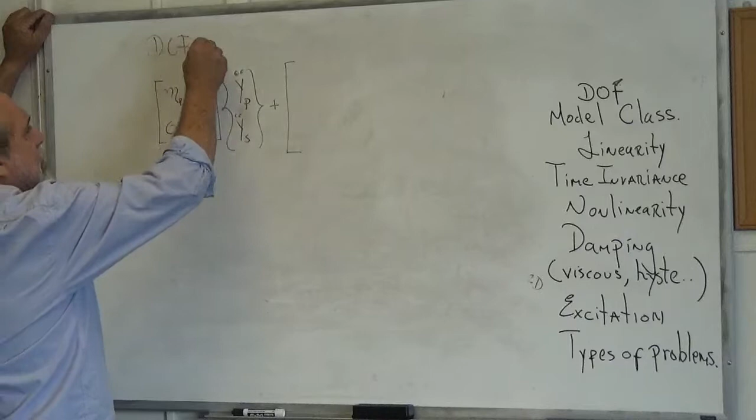Let's say that the degrees of freedom are partitioned into P and S. At this point I do not specify what P and S are, it's just an arbitrary partition. So now the stiffness matrix then becomes KPP, KPS, KSP, and KSS. And that partition matrix multiplied times YP and YS.

And then there is something on this side, which is the loads at the P's and the loads at the S's, let's say. I'm not putting any damping, but keeping it like that. Now, these are degrees of freedom, just partitions into P and S's, right?

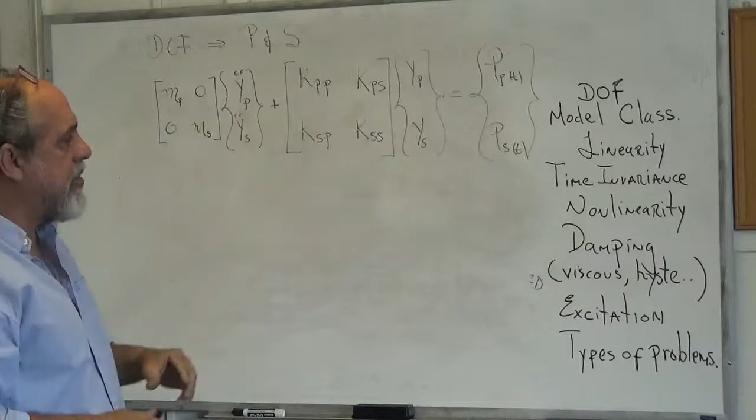In a static problem, the degrees of freedom were decided on the basis of conventional static procedures. Now I want to make the problem smaller because for dynamic analysis it's a lot of effort and so on. So I'm going to say, okay, you know what, when I partition these degrees of freedom into P and S, I really took the S's so that they have really very small mass.

So now that means that I'm going to approximate this problem by saying, I'm going to say this is MP and these guys are 0, okay? So there's no inertia associated with these degrees of freedom. So we have Y double dot P and Y double dot S, right?

Plus, and then we have this, KPP, KPS, KSP, KSS, YP, YS. Now, I don't have to do this, it's not necessary, but since this is an introductory lecture, I'm going to keep it as simple as possible.

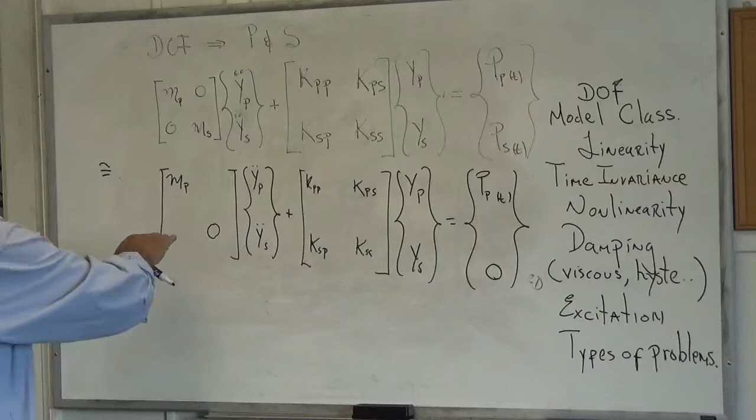So I'm going to say, let me assume also that the S coordinates are really not loaded. They could be, and it doesn't change the thing, but this will be easier, and it doesn't really affect the main point. So let's say that these coordinates are not loaded. So you can see that if you do that, the second partition of these equations reads 0 times this, right?

It reads like this: KSP times YP plus KSS times YS is equal to 0, right? These are functions of time. I mean, the YP and the YS.

So, voila, that's what we wanted. It says that YS is equal to minus the inverse of the SS partition multiplied times the KSP partition multiplied times the YP partition, right? Which tells me what? The slaves are determined by the primaries, or the masters, okay?

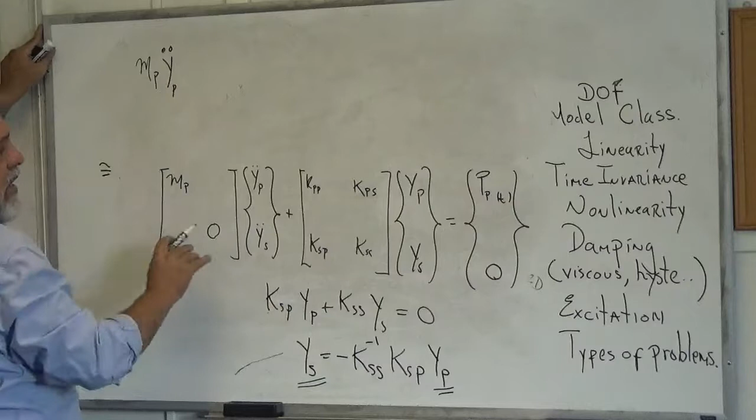Now, if that is true, that I am accepting that approximation, then I can come to the first set of equations and write MP times Y double dot, that is the second derivative of the primaries, plus KPP multiplied times YP plus KPS multiplied by YS.

But instead of YS, I'll just write this, right? Which is minus KSS to the minus 1, KSP times YP. And then all of that is equal to PPT. And we then see that this is simply MP YP double dot plus, in parentheses, KPP minus KPS KSS to the minus 1 KSP times YP is equal to PPT, right?

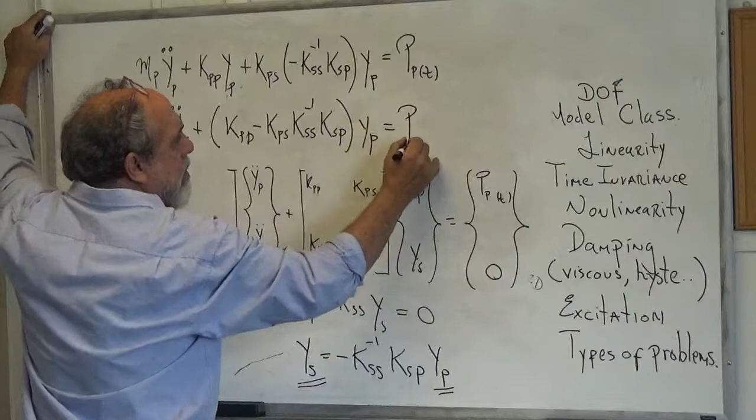And we have achieved the typical equation, right, that we expected and that we have from the single degree of freedom, looking the same, right? Which is some mass times acceleration. This one here is just another stiffness. We can call it K condensed, times YP is equal to PPT.

And so this is the equation that maybe I want to solve in dynamics. And my original degrees of freedom, maybe I had 50 P's and 300 S's. So what I'm solving is really this 50 degree of freedom problem here, not the 350 big one, right?

The stiffness of the problem depends on this part, and there are more details, but the point is, and I'll close it with this simply, that we have a set of degrees of freedom in the finite element model that we can normally divide into those that have significant inertia and those that do not have significant inertia. When I say they don't have, I mean their value doesn't induce significant inertia into the system.

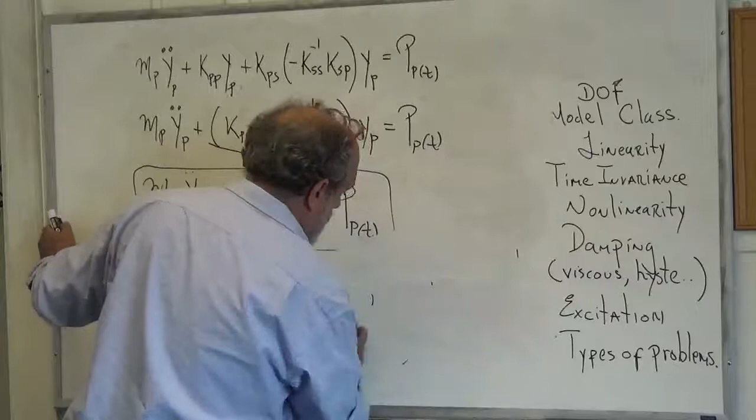If that is true, it is often convenient, in order to reduce the size of the problem, to condense out of the dynamic formulation these degrees of freedom. So we take out the degrees of freedom that do not have significant inertia. So that takes out this part here, degrees of freedom.